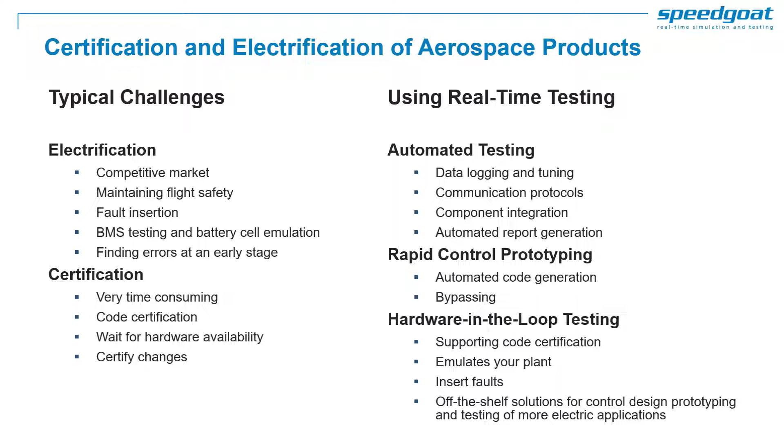So, this was an overview of the typical challenges we observe in aerospace development. Before diving into the topic of electrification and certification, I would like to show you the benefits of real-time design and test workflows. What is hardware-in-the-loop, short HIL, and how is this linked to real-time simulation and testing? A development workflow has several stages.

In aerospace, a development starts with a defined set of requirements. In order to save time, you want to do a desktop simulation of your product or your plant that you're developing. In order to see how your early design behaves in the actual environment, you can leverage controls prototyping. After the successful implementation, you want to test your controller. This can be done using hardware-in-the-loop testing.

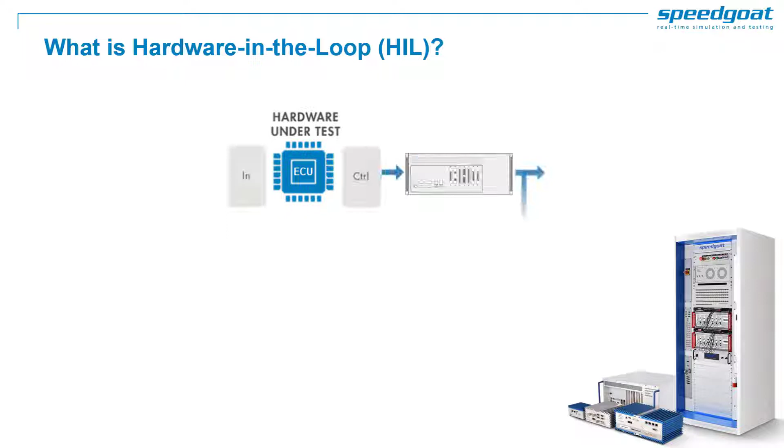During HIL testing, you have hardware under test like an electronic control unit, ECU, or a flight controller. You can simulate the environment of this controller using a plant model. The hardware under test and the plant model emulated by a real-time target machine form a closed loop. Using test automation, you can run many tests in a sequence and verify that all requirements are met.

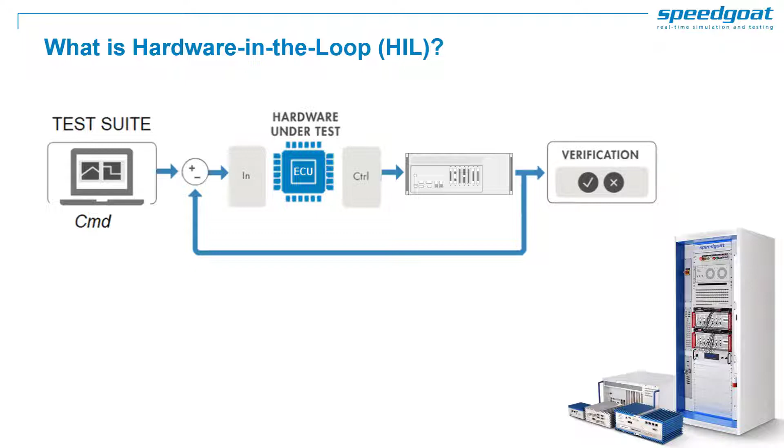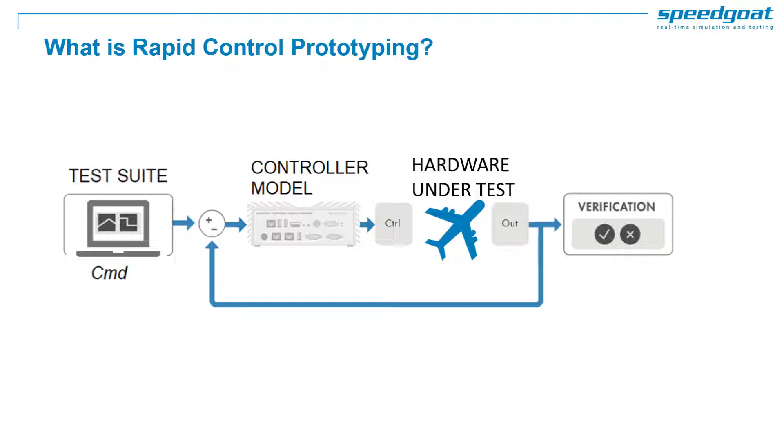The difference between HIL and rapid control prototyping is that in rapid control prototyping, the hardware under test could be your aircraft or Iron Bird. The development task is focused on the design of the controller. This means that the real-time target machine is emulating the controller and executing the code of your embedded control design.

What are the benefits of HIL testing? Using HIL testing, you can test before all the components of your projects are available. You can fix bugs earlier, and corner cases and exceedances can be simulated without damaging the actual hardware. Further components can gradually be integrated.

Virtual integration and testing solutions can be leveraged, such as deterministic emulation of plant sensors and actuators. You can use plug-and-play interfacing and leverage the benefits of test automation. To summarize, you can deliver better and faster using embedded software, while reducing costs and risks.

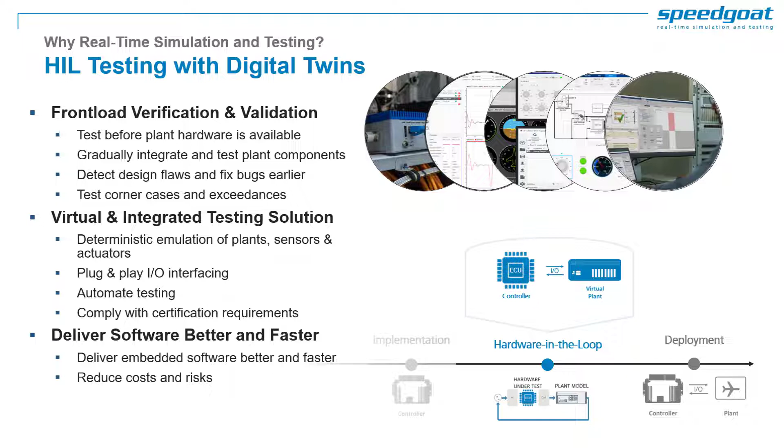With these general workflows in mind, this is a good moment to introduce the systems offered by Speedgoat, which are also used for our application examples. Let's first look at Speedgoat real-time systems to understand what it comprises. Each system is configured to your individual performance and I/O requirements. Changing requirements are not a problem, as you can reconfigure I/O. You can choose from a vast range of I/O connectivity options and exchange them at a later date.

All real-time target machines are expressly designed to work with Simulink and Simulink Real-Time. We support the current releases, but we also promise to support future releases. Our hardware quality, our long-term warranty and maintenance services ensure long-term operability of your real-time testing hardware.

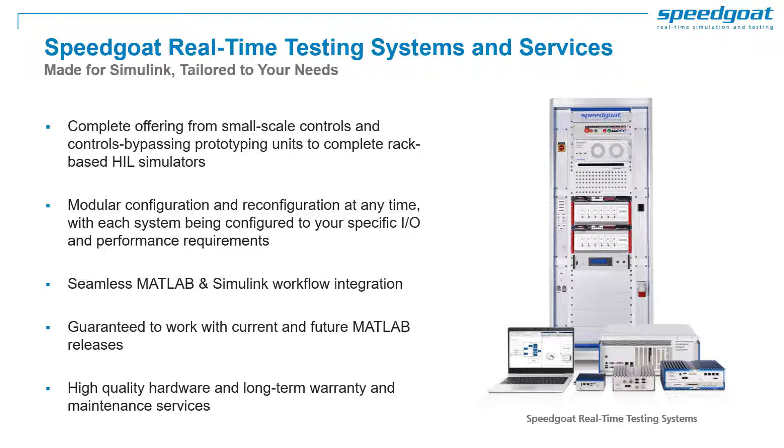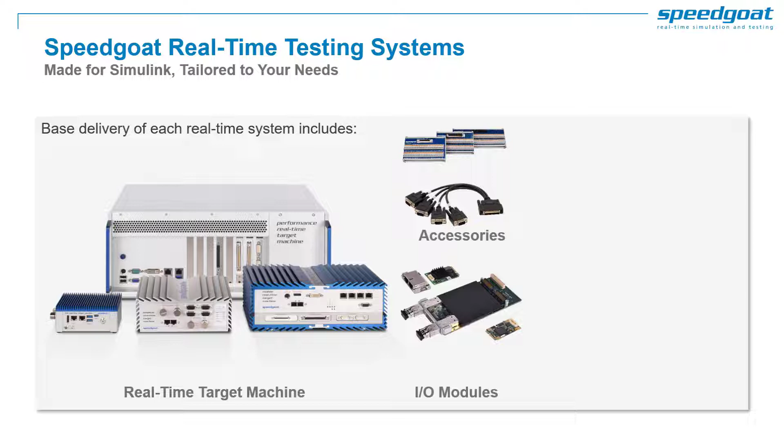Delivery of each real-time system includes the real-time target machine, I/O modules configured to your needs, together with accessories such as terminal boards and cables, and the Speedgoat I/O block set for Simulink. The block set library allows for seamless connectivity to the hardware.

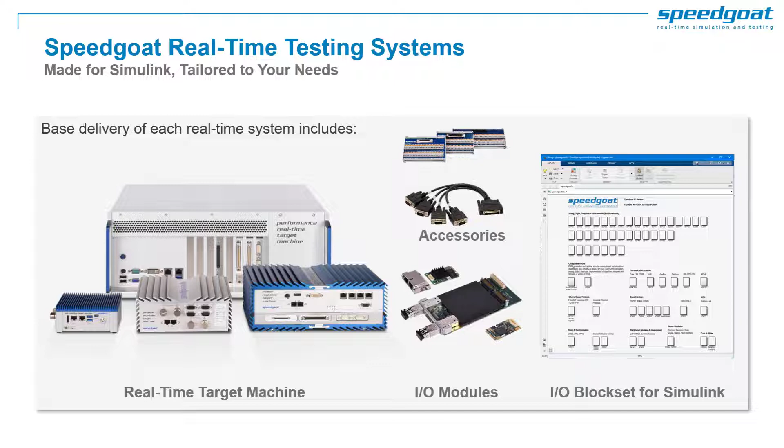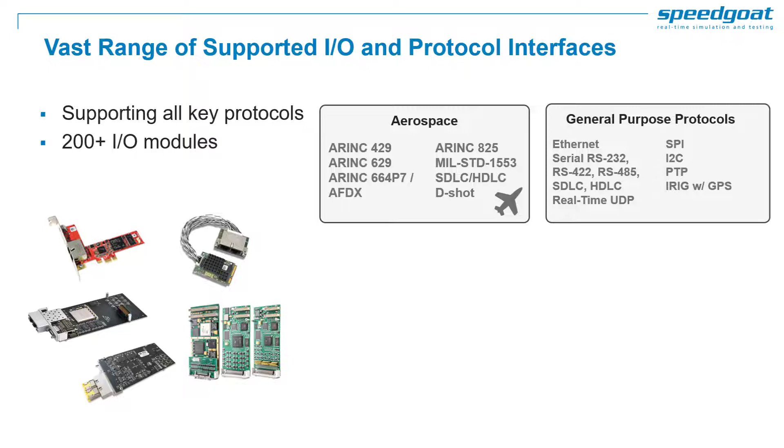Speedgoat is supporting all key protocols for the aerospace industry, such as ARINC 429, ARINC 825, AFDX, or MIL-STD-1553. Overall, we support over 200 I/O modules. We also have general purpose protocols such as SPI, I2C, Ethernet, and a vast range of analog and digital protocols. You can leverage all relevant I/O protocols at the requested voltage level and sampling rate, and even perform fault insertion. These I/O interfaces can seamlessly be integrated into the workflow from MATLAB and Simulink.

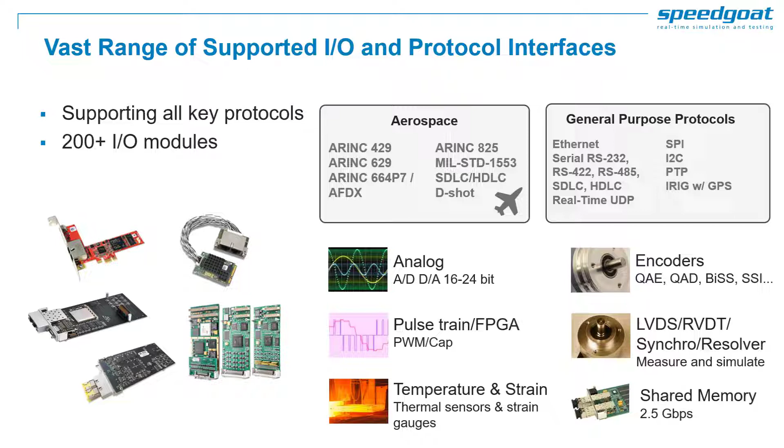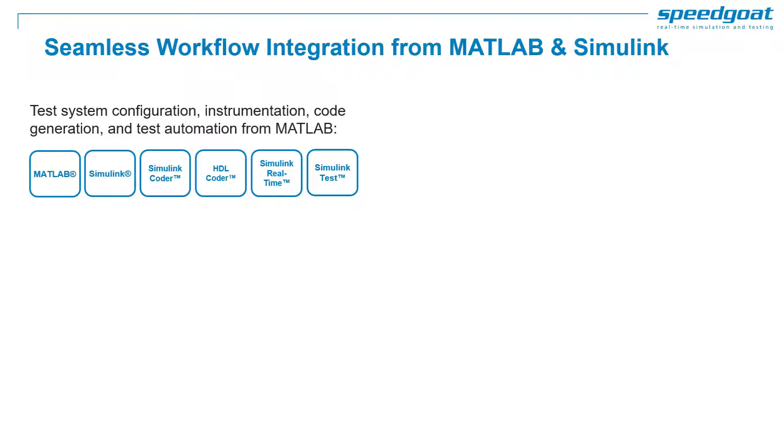In addition to these powerful all-round tools, specific commercial off-the-shelf software functionalities are available. For example, the Aerospace Toolbox and the Aerospace Blockset. Further commercial off-the-shelf software functionalities such as the UAV or the Radar Toolbox are available. Leveraging this versatile variety of functionalities ensures that all the required tools are provided for your specific project and needs.

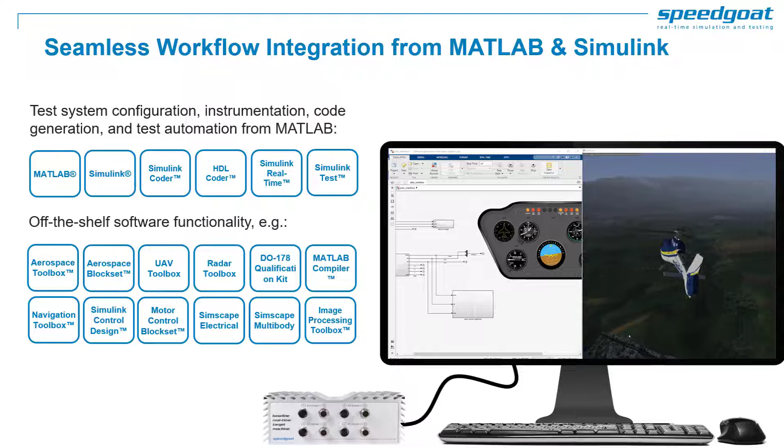Now that we've seen the tools available, let's talk about electrification, namely the challenges, before jumping into an example of a customer who is developing a hybrid electric aircraft. Real-time testing is especially useful for power management systems and battery management systems. So, more electric aircraft means that not only the propulsion system can be electrified, but other components such as control surface actuators, which we saw earlier, can be electrified too. These components depend on a battery and are fed off the onboard electric grid.

Therefore, the challenge is to design and test energy and power management systems such as onboard microgrids and battery management systems. For new concepts, the electrification of the aircraft or the integration and testing of a new fuel cell is a challenge. Also, the interfacing with power electronics components and inverters is a demanding task. As mentioned earlier, the seamless workflow integration with Simulink to build, test, and run power systems and power electronics simulations enables you to test power management systems.

Using Speedgoat, you can perform battery emulation for up to 320 cells and state of charge and state of health estimations. The HIL setup allows you to do signal conditioning. For example, you can increase your voltage level to 28 volts, which is usually required for civil aviation. Also, the low latency interface to power amplifiers gives you a realistic representation of your onboard microgrid.

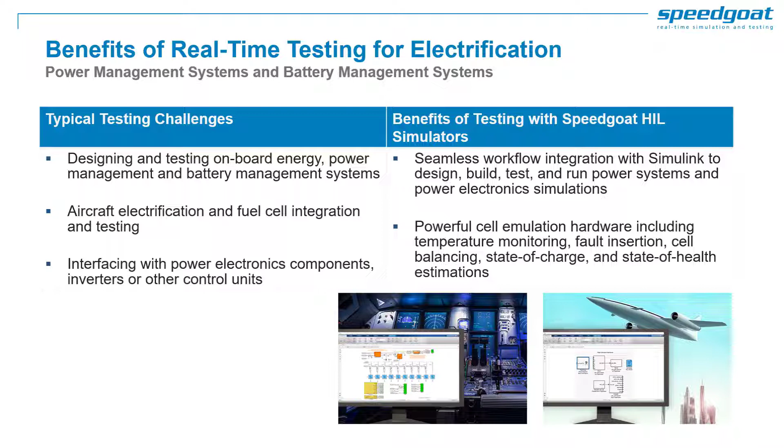Let's have a look at the example of the FVA-30. The FVA-30 is a hybrid electric aircraft which is under development from the Scientific Aviation Association in Aachen. The goal of this aircraft is to electrically fly the distance between Aachen and Berlin, which is over 500 kilometers.

In order to set up an Iron Bird, the association needed a test bench to test the powertrain for the hybrid aircraft. The solution was to use a Speedgoat target machine. They were able to rapidly set up their test bench and start testing. This Iron Bird setup is also an essential part of the compliance demonstration in order to fully certify the aircraft.

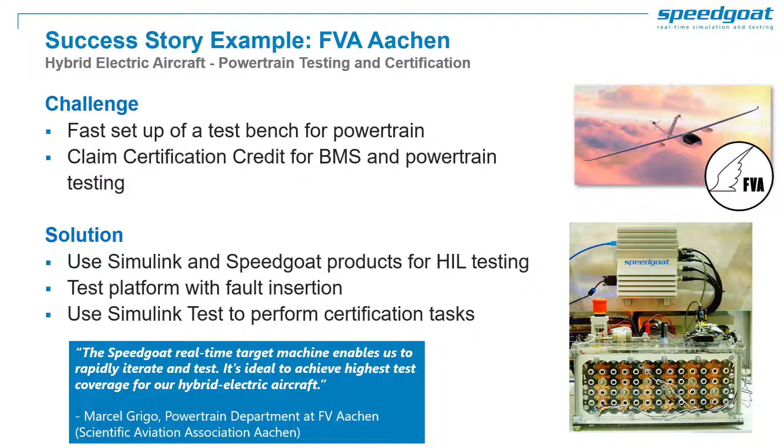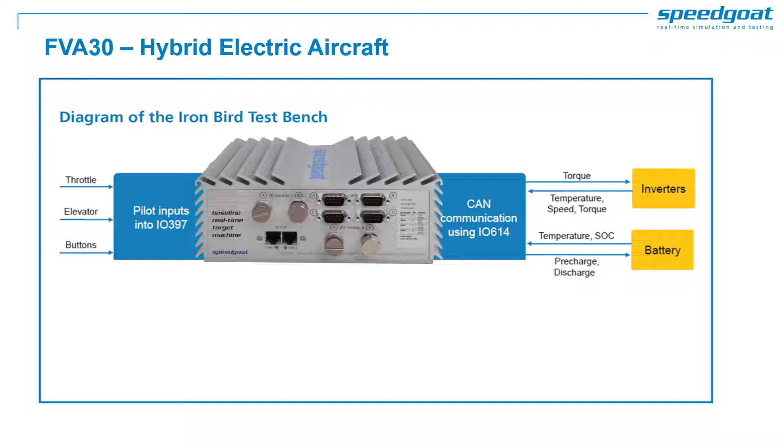Let's have a look at how they used the real-time target machine within their test bench. The baseline target machine acts as the controller and heart of the Iron Bird. From the pilot side, input commands such as the throttle and elevator angle are fed into the target machine. Inside the target machine, the actual motor control takes place.

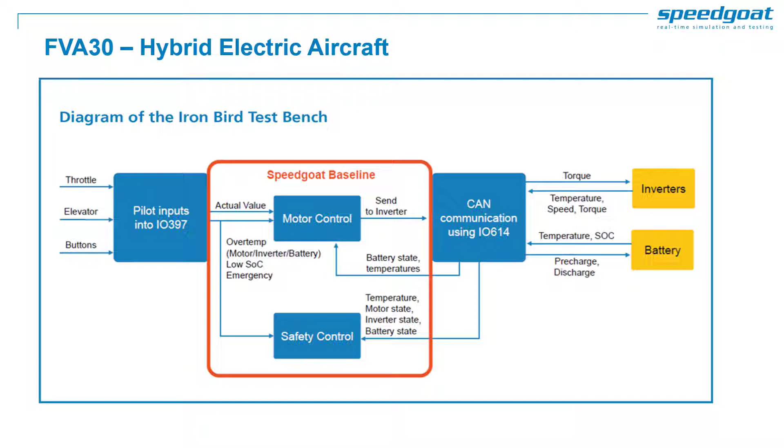On the test bench, the target machine is controlling the motors through the inverters as well as the battery using a CAN interface. Let me quickly show you how they realized the individual components of their test bench. The team used the Real-Time Explorer to keep track of the system state. This is quite useful during development testing. Furthermore, they designed their own GUI in order to monitor and control the tests.

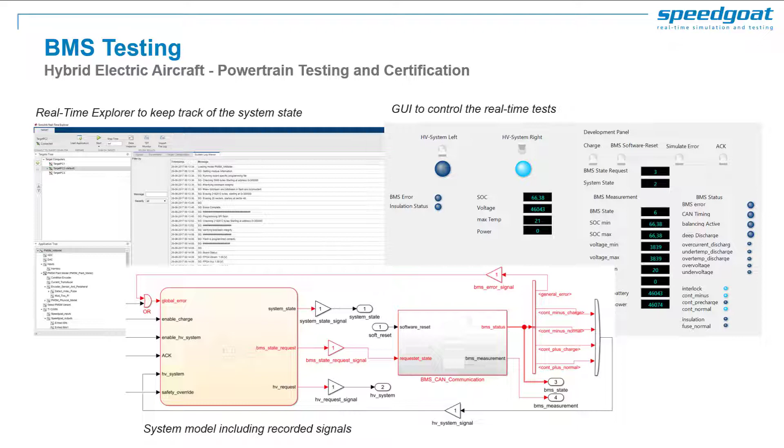The system was modeled using Simulink Real-Time, which enabled them to build a model of their system within a very short time. There are two white papers about this topic written by the engineers of the Scientific Association in Aachen, which are uploaded on the Speedgoat webpage. Feel free to have a closer look at how Speedgoat helped them to integrate their BMS system and to perform certification testing.

One of the topics related to the example we just saw is the testing of power electronics and electric motor control. One of the challenges is the design and testing of high-fidelity, low-latency power electronics control systems. Another more specific one is the need for powerful HIL simulation hardware, allowing for sample steps below 1 microsecond and a pulse width modulation resolution below 10 nanoseconds. By using the Speedgoat system with an FPGA, you can achieve time steps below 1 microsecond and PWM resolution below 10 nanoseconds, even for applications with many I/O channels.

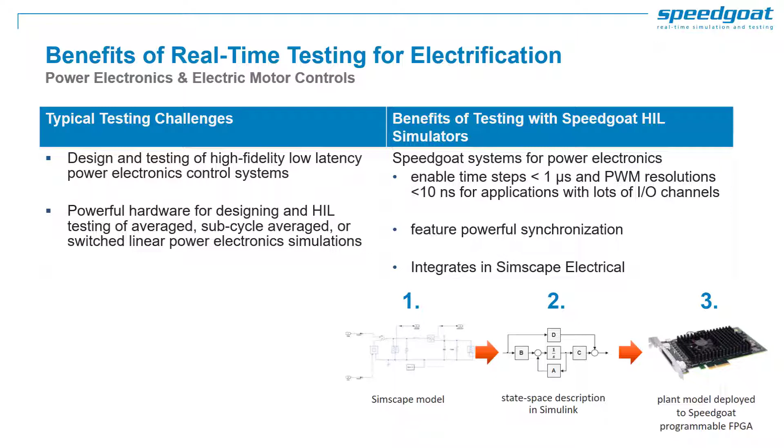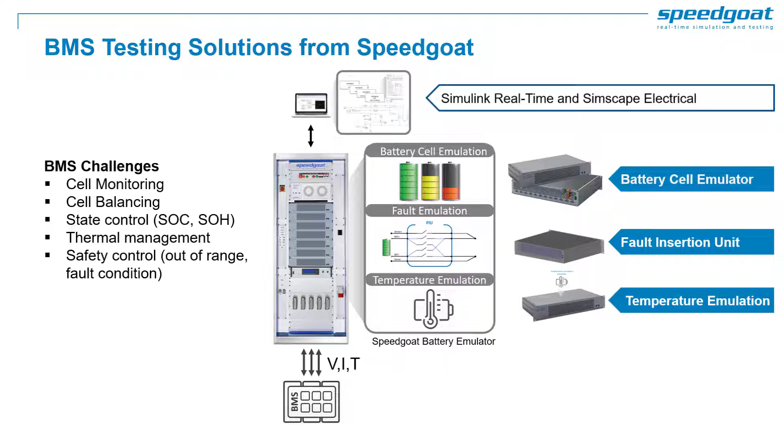So, how can you test your batteries and BMS systems? The typical task would be to monitor or balance cells, to control the state of health or the state of charge, and to do thermal management. Also, inserting faults is a rather large topic. Speedgoat allows you to deploy your Simscape Electrical model in real time in order to perform all the tasks mentioned above. The test rack can be customized to contain a battery cell emulator, fault insertion units, or even units to perform temperature emulation. Depending on your projects, signal conditioning can be added to the testing solution as required for your needs.

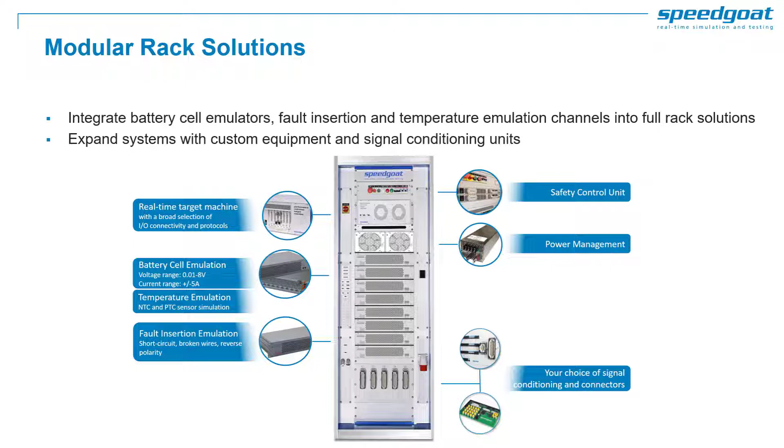Following on from the electrification examples, let's now look at how the same tools can be used for a certification workflow. As mentioned earlier, many aerospace projects at one stage will face a similar challenge, namely certification. Many scenarios need to be tested and documented. Most tests first need to be performed in a virtual development stage due to safety considerations or hardware costs. Also, the test setup must allow gradual integration and testing of line replaceable units.

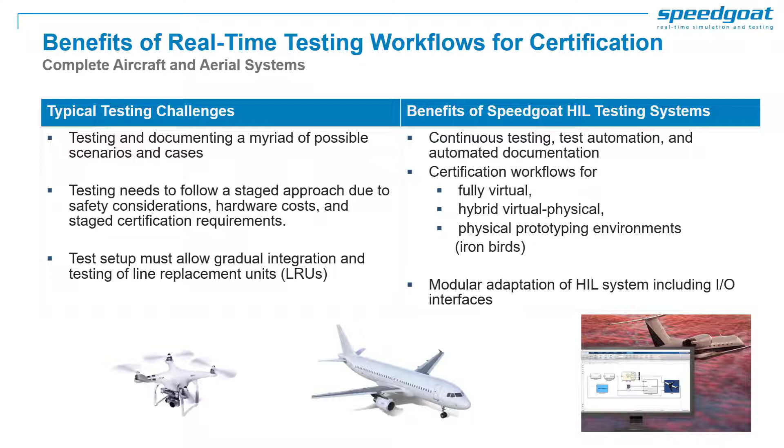The benefit of HIL testing using Speedgoat is clearly the test and documentation automation for virtual, hybrid virtual-physical and physical prototyping environments such as Iron Bird. The modular adaptation of HIL systems including I/O interfaces allows you to obtain a solution tailored to your needs. The last great benefit I would like to mention is the seamless workflow integration to run plant simulations designed with Simulink.

Most design and verification workflows look similar. There are two main certification workflows used in the aerospace industry. First, there is the more traditional V model, where on the left side you define the requirements and perform system architectures at a higher level. After the development, the software, controller or system is validated and finally certified. You can already see that you can shortcut this process by performing component and system verification before the development of the software is completed using model-based design.

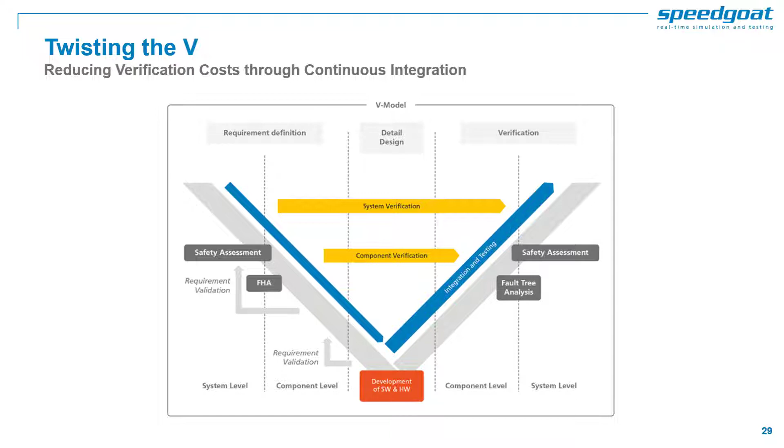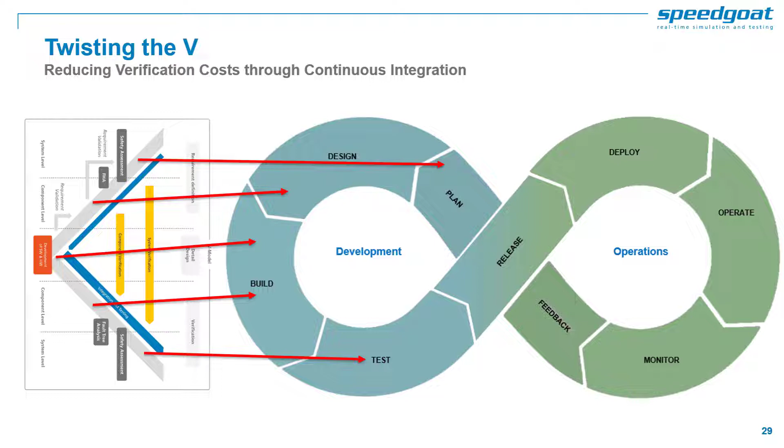The same method can also be applied for more agile workflows like the DevOps one. You can see that the same testing, verification and certification shortcuts can be taken using real-time testing. To summarize, the real-time testing solution integrates well with any overall workflow or design concept.

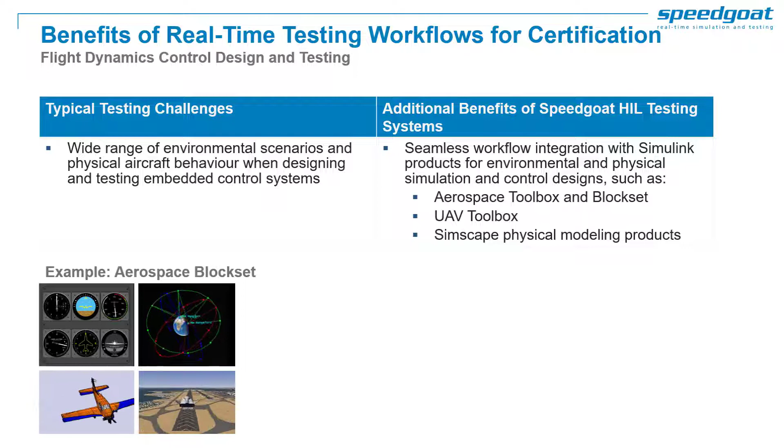Let's look at another use case: flight dynamics control design and testing, before we dive into the certification example. The big challenge is the need for an environment which allows you to test the behavior of your vehicle, especially during failure cases. You can overcome this challenge by using environment emulation with the Aerospace Blockset within Simulink. We have a great example of a flight control system which illustrates that.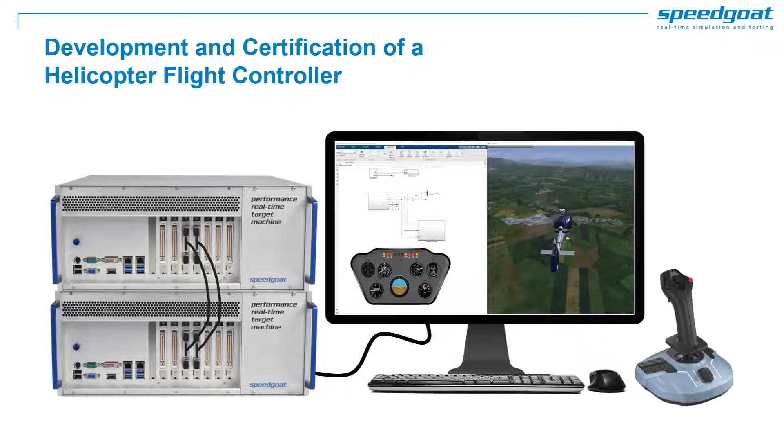The aim of this example is to show the testing and verification process of a helicopter flight controller. Although the design of the flight controller has also been done using Simulink, I will not go into too much detail about the development itself. Let me start by showing you the overview of this example. You start off with the requirements for the controls. These can be functional requirements as well as certification requirements.

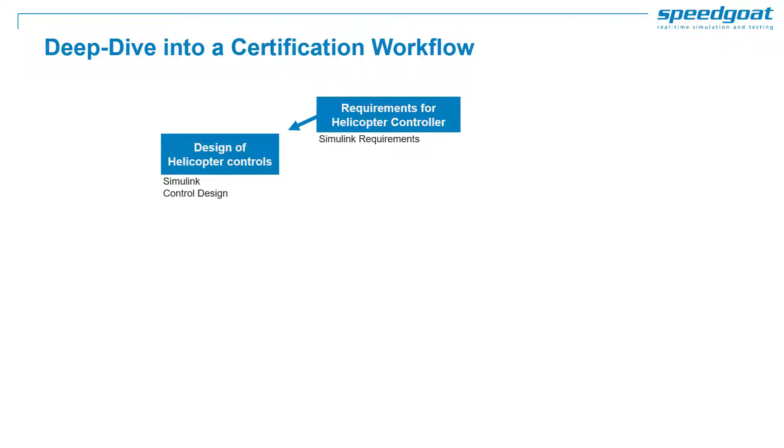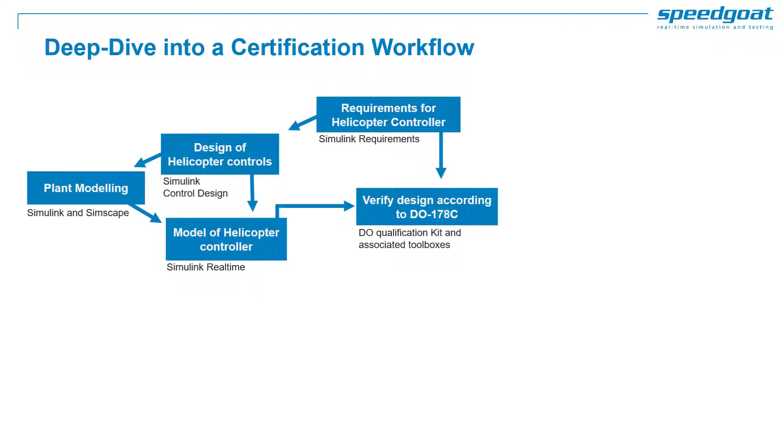Using Simulink Control Design, you can prototype the control of the helicopter and already test the basic functionalities using plant modeling. This allows you to create the first virtual twin of your helicopter. With your model and controller, you can simulate signal functions and perform design verification according to design standards. In our case, we use the DO-178C.

In order to do more extensive and automated testing, you can use Simulink Test, in this case according to the ARP 4754A standard. Once you are happy with your desktop simulation, you can perform the same tests using the actual flight control hardware while interfacing it with a Speedgoat target machine. This allows you to use the same test automation on your real hardware and claim credit for your certification tests.

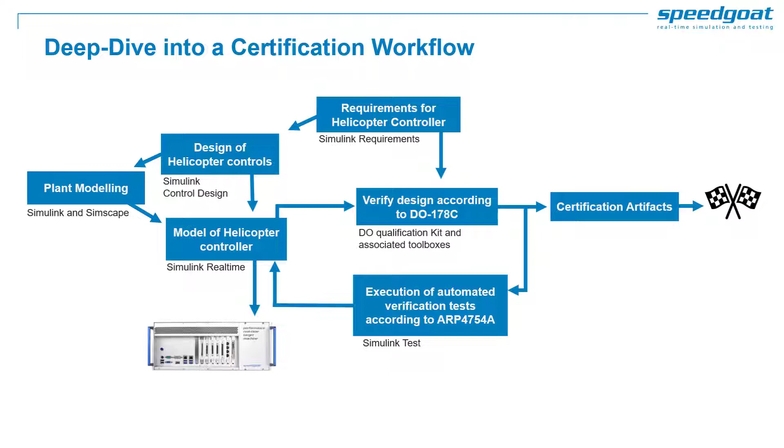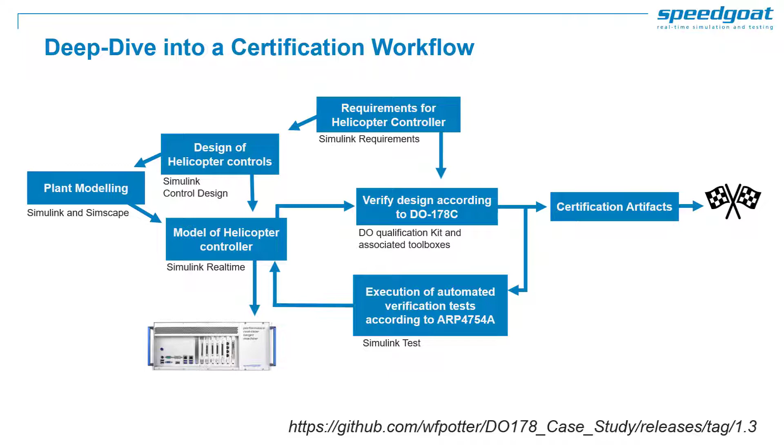In order to demonstrate this concept, we've done the following. On one Speedgoat target machine, we've loaded the model of the flight control computer, which is our system under test. This target hardware could also be a real flight controller. On a second Speedgoat target machine, we've put the plant model, which is the physical model of the helicopter, the sensors and emulated air data.

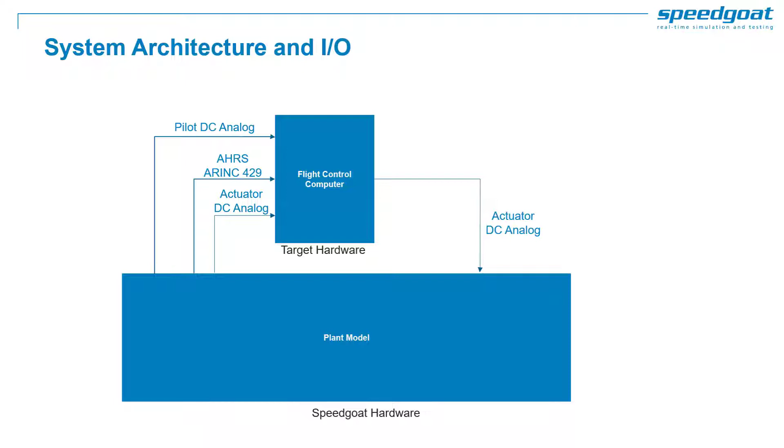The two target machines are talking together using an ARINC 429 bus as well as an analog DC connection. The analog line is used to send the flight commands to the flight controller, as would be the case in the real helicopter, while the ARINC 429 line submits the sensor data such as altitude, attitude or airspeed. This setup allows us to demonstrate the complete test harness.

This is the test setup with the joystick for pilot inputs into Simulink Real-Time, which is running on the computer. The target machines are connected through the ARINC and analog bus together and are feeding the information back to Simulink Real-Time and FlightGear for visualization. I will now show you the test harness within Simulink before coming back to this complete setup. We start with the desktop simulation part.

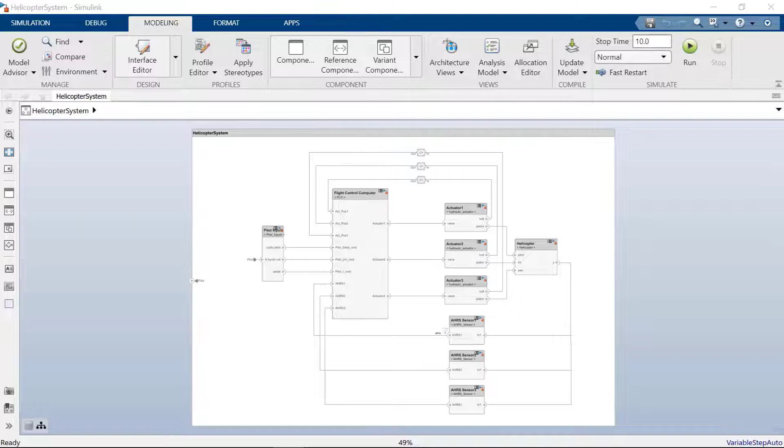First, I'd like to show a picture of the actual system under test, which in this case is the flight control computer containing our control algorithms. The flight control computer is surrounded by plant models. For example, for hydraulic actuators, there's 3 of those. The helicopter itself, 3 AHRS sensors, and then there's also pilot inputs, which come basically from a joystick input or pilot stick inputs on that real helicopter. So this represents the system under test.

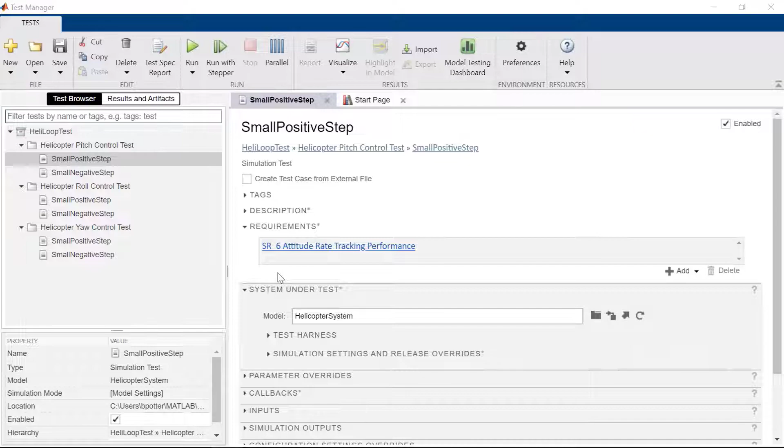Now, once we run these simulations, which I've already done, and to expedite this, I'm just going to show the test report. We need to have a test report generated as our certification artifact. So this is the report that's generated from Simulink Test. I'll open it up here. You can see that all of our test cases actually passed. So we've satisfied all of our requirements.

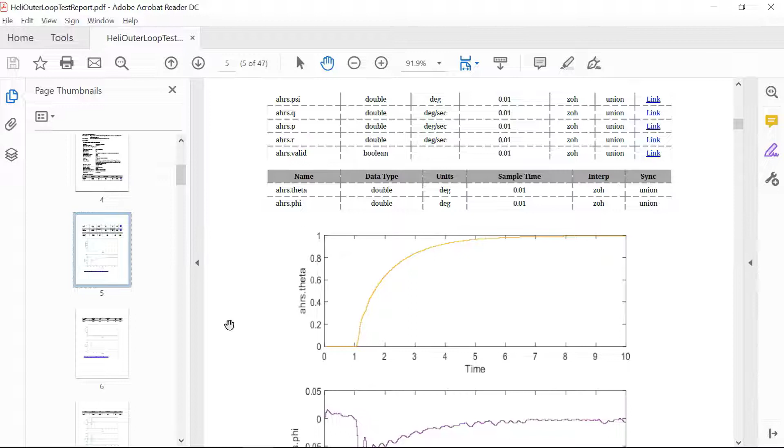We can also see that within the report itself we have some plots. For example, this is the plot for the pitch axis step. You can see the step response here in the test. You can also see that the test in fact did pass. So here we've done our work on the desktop, and the next step is going to be to transition to the real-time system repeating these same tests.

In the project folder, under System Verification, Real-Time Tests, there is a pre-built Simulink Test suite comprising multiple real-time test scenarios to test the controller performance for the set point changes in the pitch, roll and yaw direction. The model under test is the helicopter plant, which we can open directly from the test manager. This is the plant model, which is connected to a second real-time target machine using I/O interfaces.

Analog signals are used to receive actuator commands from the flight control computer and to send actuator positions and the pilot inputs to the flight control computer. Additionally, the ARINC 429 protocol and respective I/O modules are used to transfer the sensor data from the attitude and heading reference system to the flight controller.

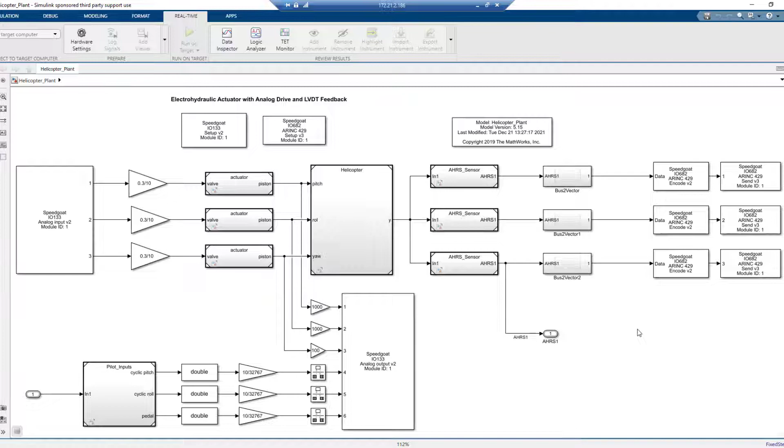So let's take a look at the flight control computer model, which lies in the implementation folder of the project. FCC I/O is the version configured to use the I/O interfaces I mentioned. Here we can see the counterparts of the send and receive blocks. We receive the analog signals from the actuators and pilot input, as well as the AHRS sensor data over ARINC. The resulting actuator commands are again sent over analog I/O.

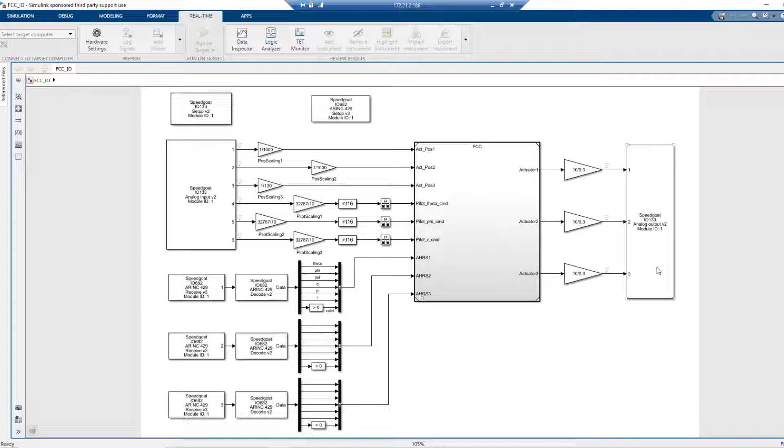Going back to the test manager, let's see how we handle the automated initialization of both systems. The preload callback function is used to define the pilot inputs for this test case and map them to the root level inport of the model. Then we also build the second Simulink model with the flight control computer and load it onto the second real-time target machine, which is not directly controlled by Simulink Test.

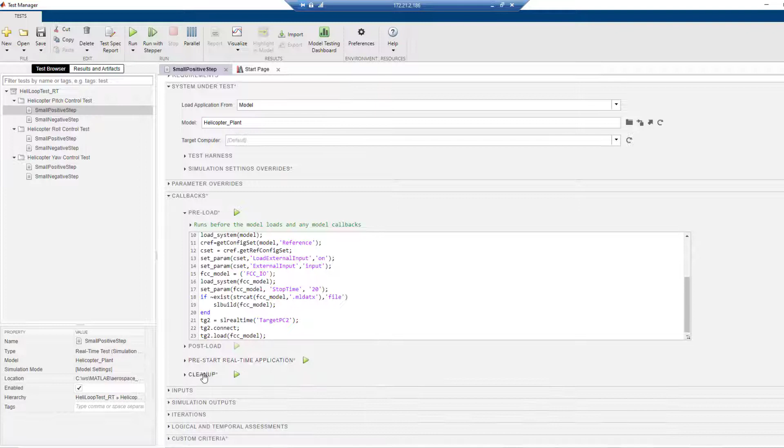Before the plant model is executed, we start running the flight controller on the second machine by calling the start command in the pre-start callback function. After our test is completed, we stop the second machine using the cleanup callback function.

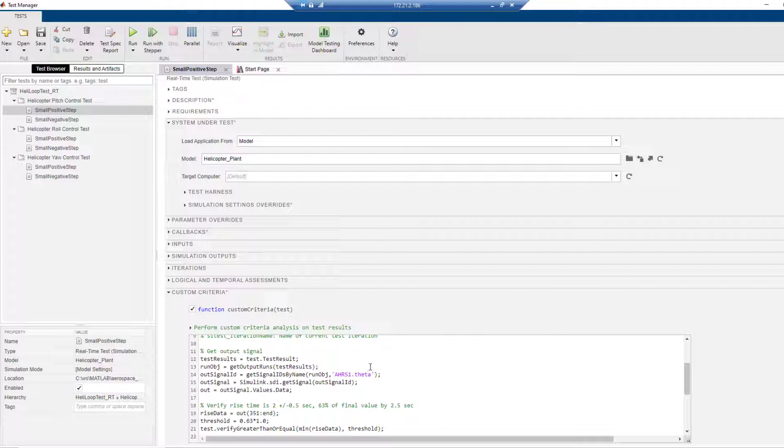The outcome of the test is evaluated using a custom criteria function. Here we have access to all of the relevant data logs and check that our data meets certain criteria needed to pass the test. The same process is then used to test the step response of the opposite pitch direction, as well as for the other axes, roll and yaw.

By executing the entire test suite, all 6 real-time test cases will be run and evaluated in a fully automated manner. So let's go ahead and do that by clicking the Run button. We are now running the real-time test. We generated code first. It got downloaded to the target the first time and it's running.

You will see that we're sequencing through the 6 test cases. You can see that from the test manager here. It's now completed and the report generation has started. In just a few moments, it will populate the results. This is the report which has been generated.

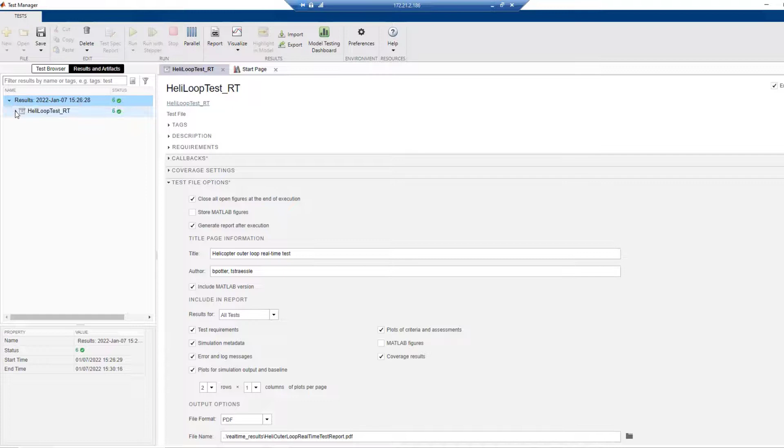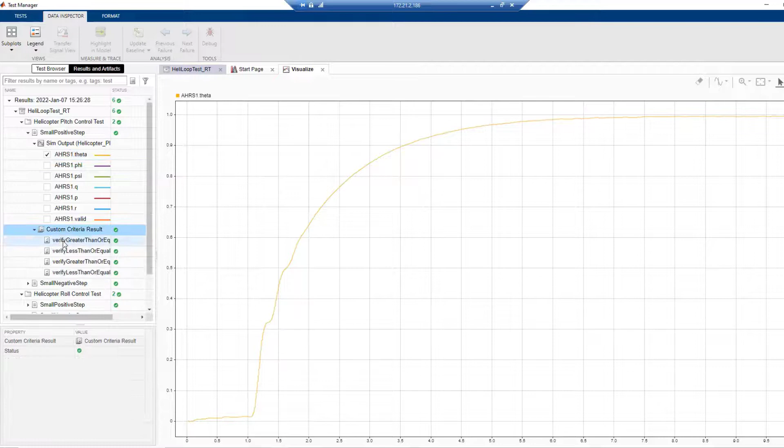Going back to the test manager, you see all the test results have been populated and all of the tests have passed. To start, we can see the plot of theta, which is the pitch response. And here is the custom criteria that we have set up for verifying the pass-fail for that. Now we can go and have a look at the report.

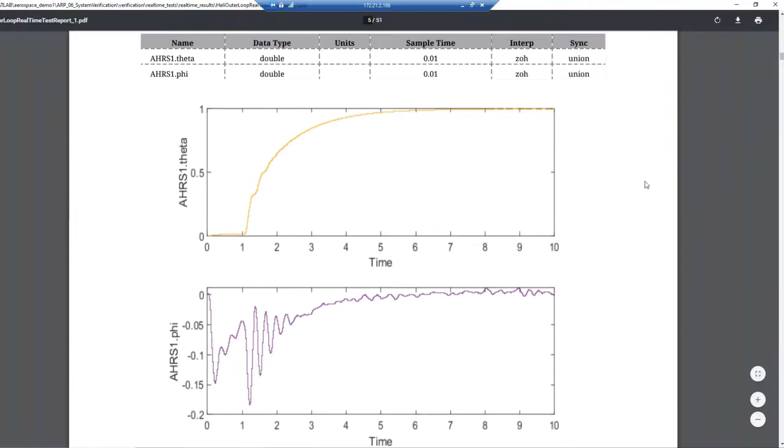This one is the report for the real-time data. In here, you can see the plot of theta again, which is the pitch axis. Scrolling down through the report, you see the custom criteria showing that we've met the minimum rise time. Here, you can see the negative theta plot.

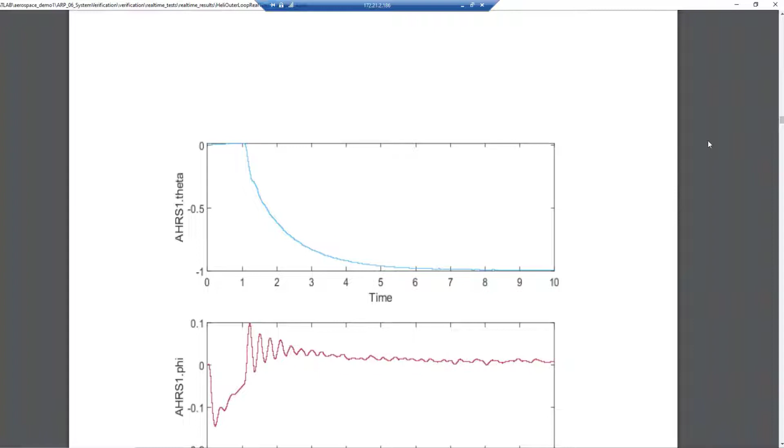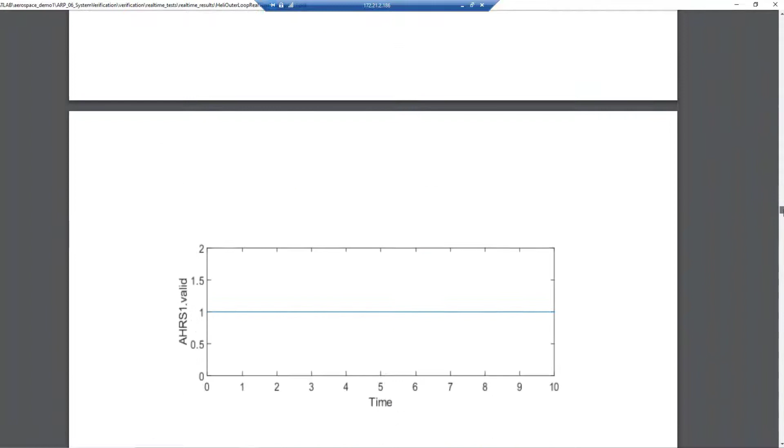Further down, we have the roll axis and you see the roll step here. So we have a positive roll step. Continuing, we'll see a negative roll step, which is another one of our tests. Then finally, move on down through the report to the yaw step. This one is the step for the yaw rate. You can clearly see overshoot and rise time for yaw in the tracking.

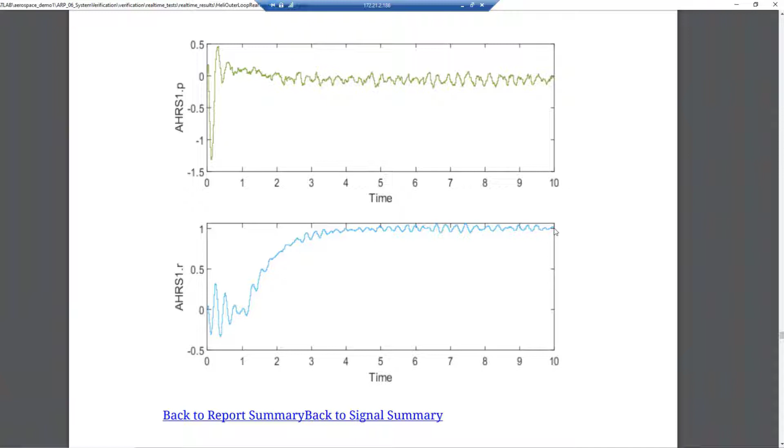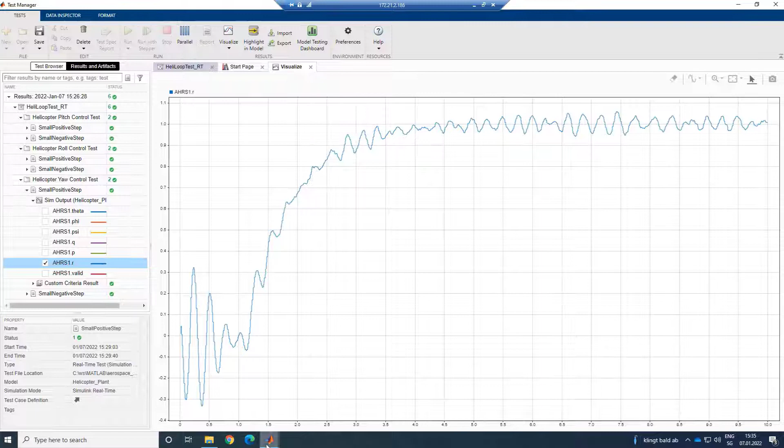This signal is more noisy because it is a rate signal, and the rate loops are more noisy than the attitude loops. Here is that same signal back in the test manager view. Finally, down here there are some custom criteria for the test as well. And we do pass the custom criteria. Let's go back to the report summary again. Here's the 6 tests that all passed in the report summary.

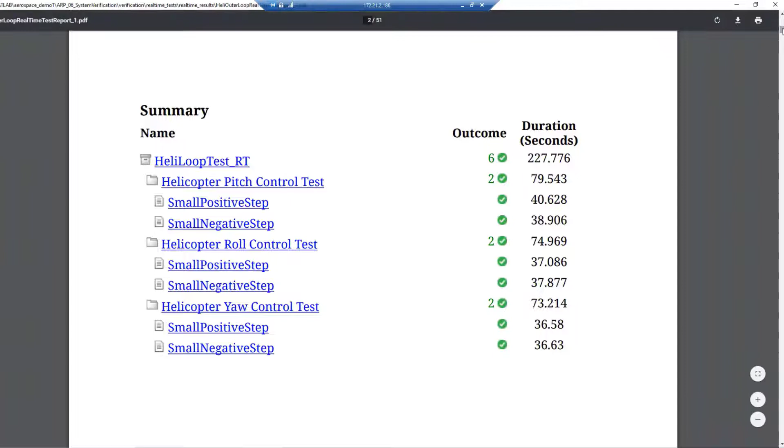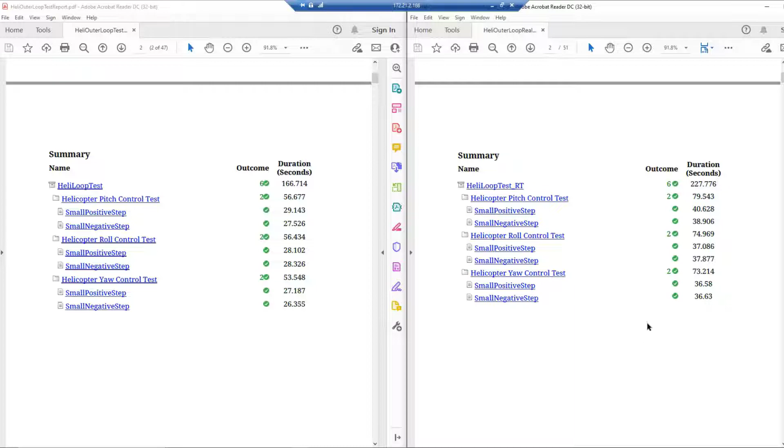Moving on, we can now actually look at the 2 reports side by side for the simulation cases as well as the real-time tests. So the simulation case report is on the left. This was what we did earlier on the desktop. The one for real-time testing is on the right. That's also the one that we were just looking at, but here we will be able to actually see some minor differences between the results.

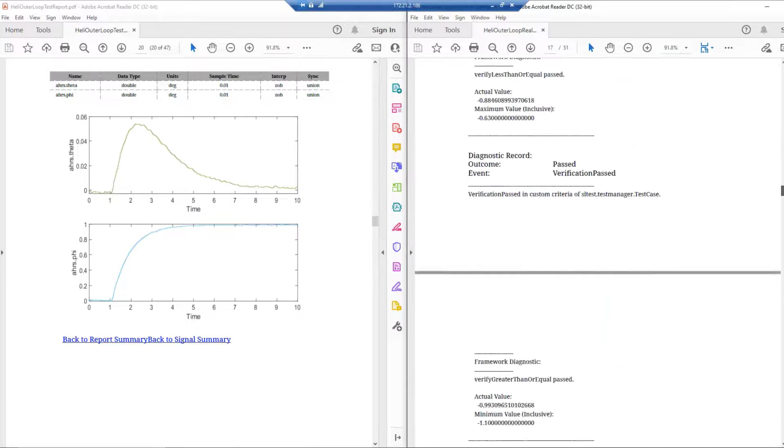Here is the roll step. You will see there's a little bit of an initialization issue in roll as well in the real-time system. It is compared to the desktop, which is more an ideal situation. Again, here's the negative roll step. You see the basic curve there looks the same, just a little bit more noise on the actual real-time system.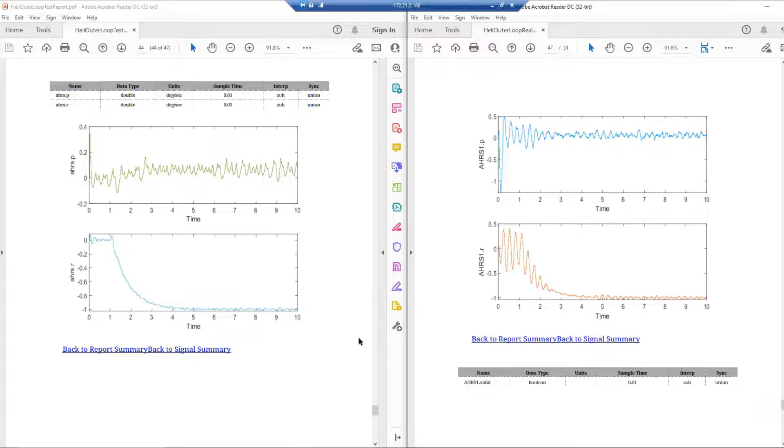For the engineers, this could mean that there could be some work to do in order to damp out some of the noise in the real system. They could maybe take into account some extra delays that are actually in the system due to the digital bus feedback, for example. Now we can go back to the report summaries. And these 2 reports actually now provide us with the certification evidence we need to show that we fully tested the system.

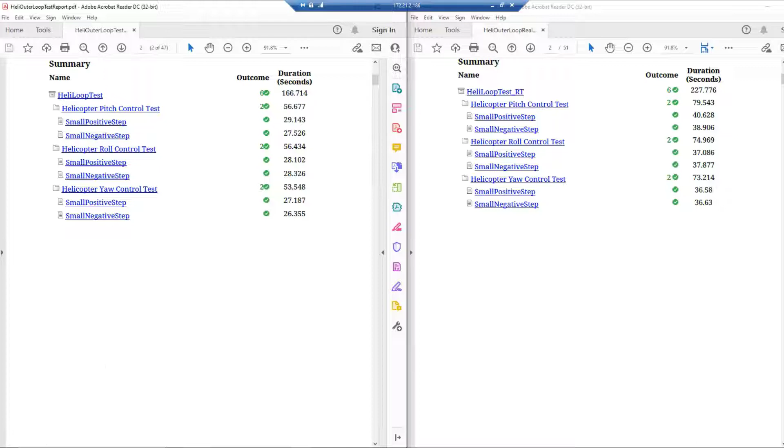Now, instead of running the automated test, we can also perform real-time testing using manual pilot inputs. This can be useful during development testing or for determining handling qualities. So now we give a manual input to the flight controller and see how the plant reacts. You can see some movements on the gauges on the screen.

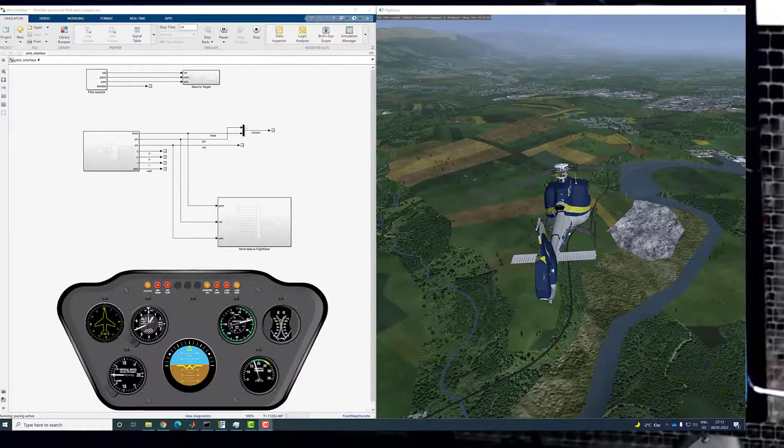They are moving as we give different pilot input signals. In this case, the visualization of the helicopter is done in FlightGear, since Simulink provides a direct output of flight data such as attitude, RPM or airspeed to FlightGear.

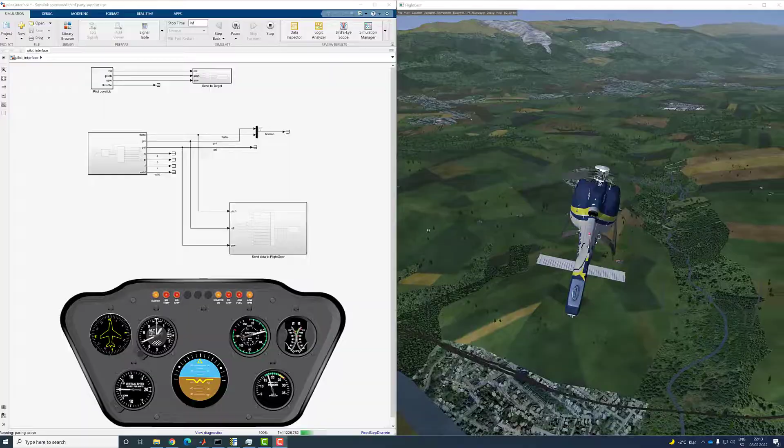After having seen this demo, I would like to show you the example of how Airbus used bypassing to accelerate their certification process. The challenge that Airbus was facing was to tune different functions of their aircraft and flight control systems. If every parameter change has to go through a review and test process, such a tuning exercise can take months.

Therefore, some smart engineers at Airbus introduced the bypassing rapid prototyping. This allows them to tune parameters while having their Iron Bird running by bypassing single functions. I will show in the next slide how this is done. While data gathered with this method is not used for certification directly, Airbus used bypassing to speed up the process leading up to certification. At the end, all requirements are proven on the real computers or on the official certified platform OCASIM.

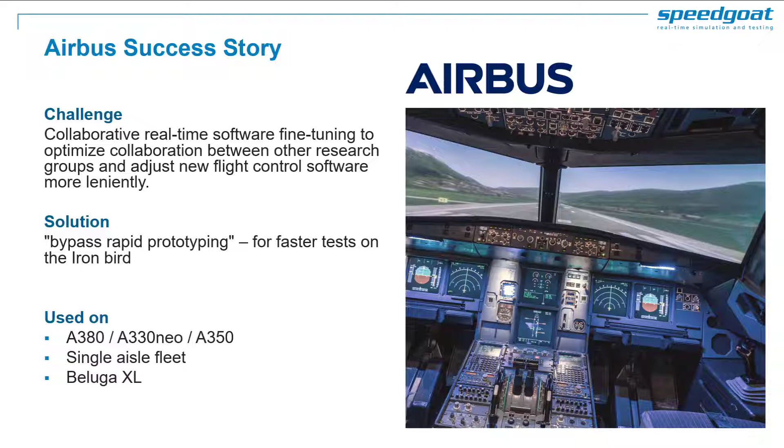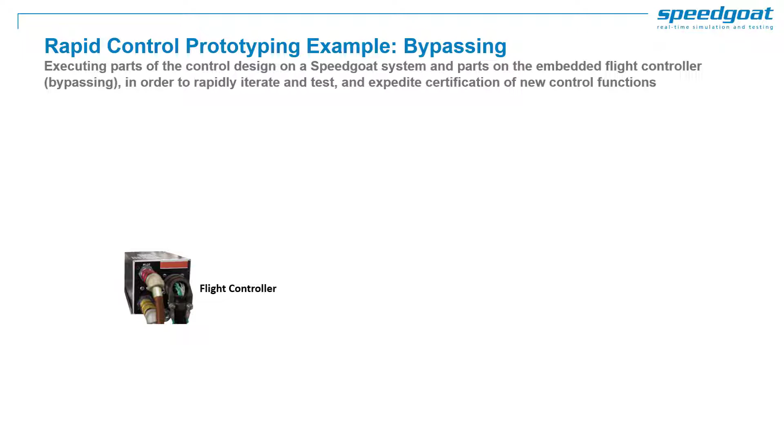I would like to show you how bypassing actually works. If you want to work on one specific function for a new software build on your flight controller, which is already certified, this may come in handy. Let's say you have your flight controller here, with your flight control software, which is represented by these blocks which run in a continuous loop. Your goal now is to certify just one function or test and tune one function.

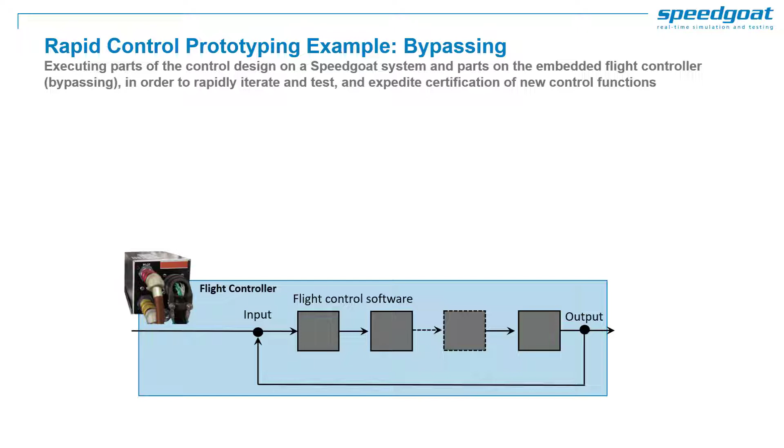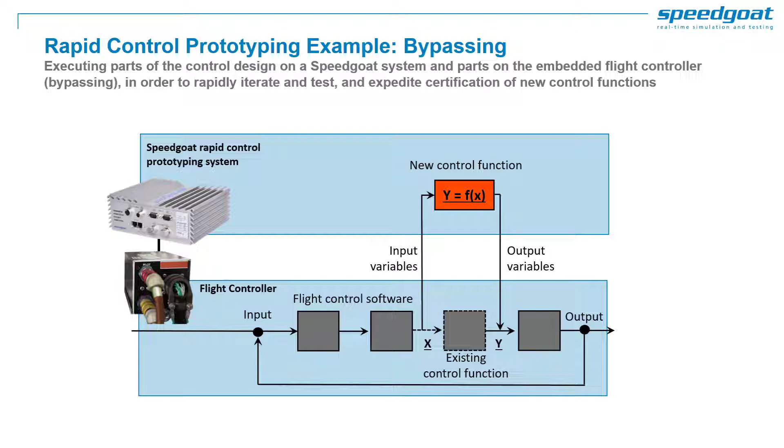Using your rapid control prototyping system, which is obviously a Speedgoat target machine, you can input the variables from the flight controllers or from the flight control software into your Speedgoat target machine, perform one specific operation, and then output the variable again. This allows you to tune only specific details of the algorithm.

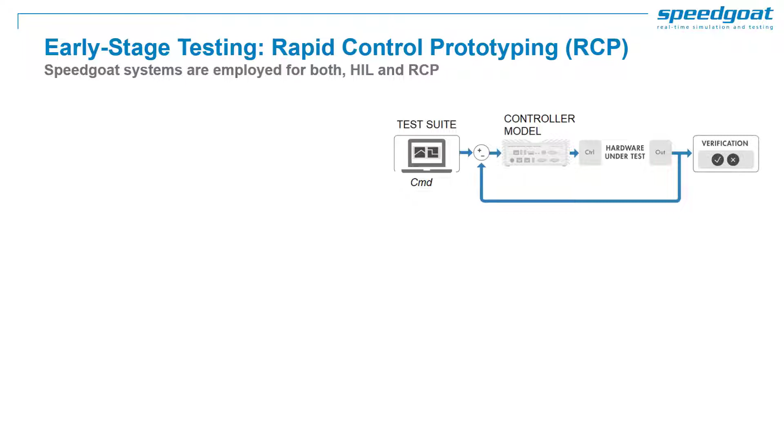As you saw earlier, hardware in the loop is usually preceded by rapid control prototyping. Your workflow may deviate slightly, but I am pretty sure that you agree on the following three main motivations for real-time based control prototyping. By testing early, you can prove that your algorithms work in real-world dynamics. You might find better trade-offs and tweak performances.

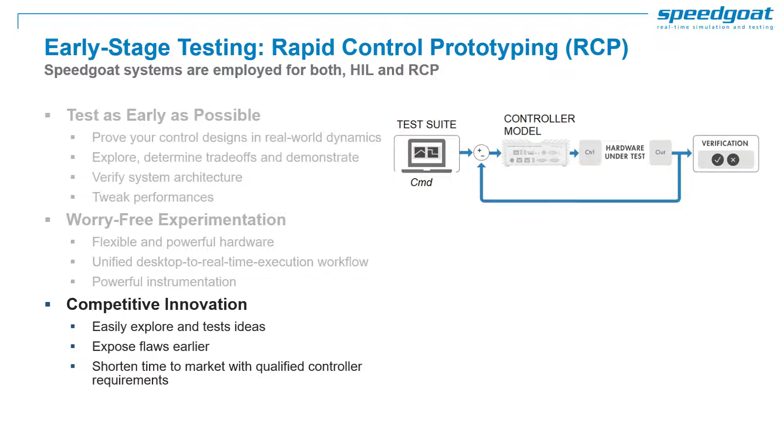The unified workflow provides a path from desktop simulation to automated testing with flexible and powerful hardware. This unique combination allows you to worry less while testing. Ultimately, you can be more innovative, expose design flaws earlier, and shorten time to market.

How can companies integrate model-based design in their electrification and certification workflow? It is important to know that implementing this new approach may not be straightforward at first. Creating models will take some time and also requires new skills. So, there is an initial investment for every company planning to implement that.

Many aerospace companies work under a lot of pressure to achieve certification and sometimes don't take the time for the implementation of better workflows. They are often punished later on. So, it is a good idea to start this early. This example from Airbus showed how they overcame their initial fear of the new approach by pointing out the benefits.

Alonso Pardo presented this graph at a MATLAB symposium. I find it quite interesting because it shows how you can increase the flexibility and increase reusability using model-based design. Finally, the engineers can detect design failures earlier and also simply be engineers again. So they can spend time understanding the systems and don't have to spend time building up the models and worrying about interfaces or documentation.

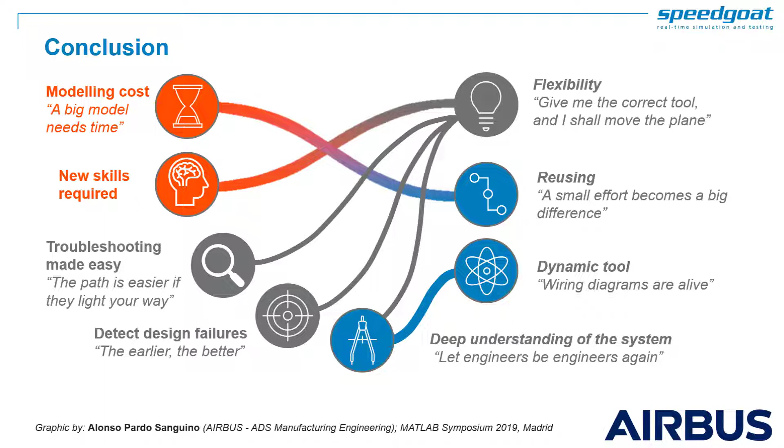To conclude, I hope that you learned how you can accelerate the development of control systems of electric aircraft with real-time testing and model-based design. Second, you experienced how Speedgoat enables you to streamline certification and testing of aerospace control systems using Simulink, hardware-in-the-loop, and automated testing. Last but not least, you saw how you can seamlessly transition from desktop simulation to real-time testing using only one Simulink model and requirement test suite.